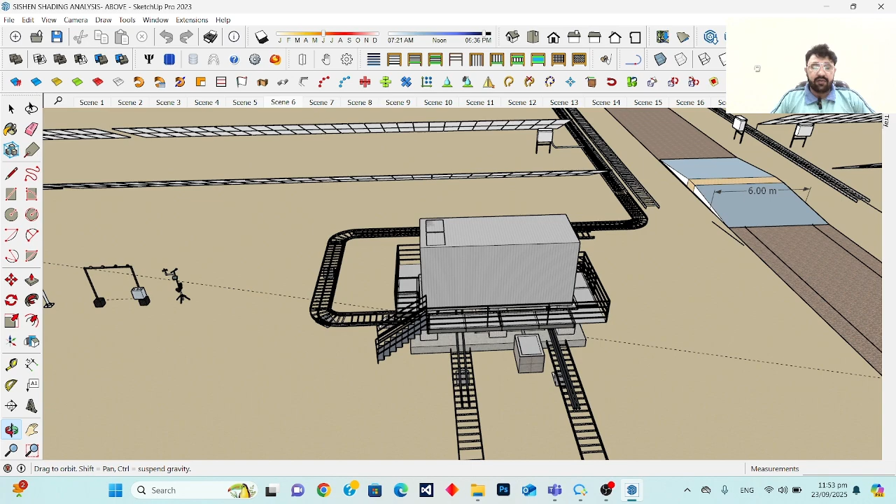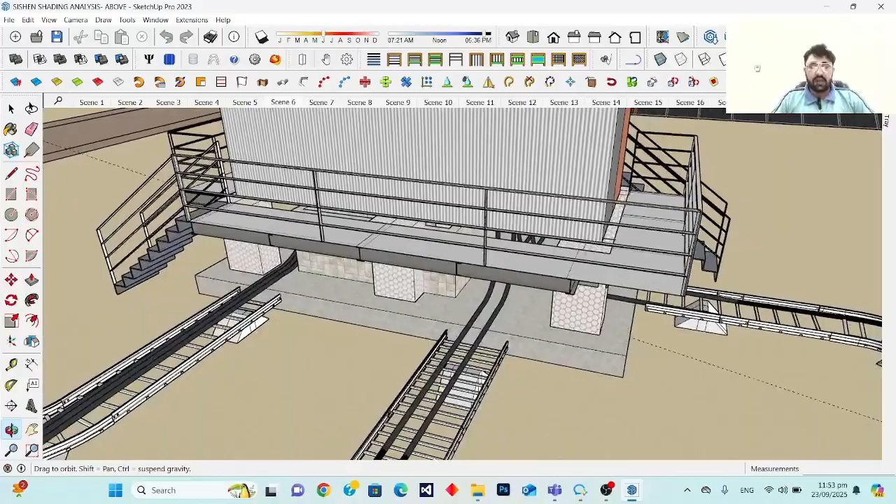So for that reason, I am giving you one solution, so you can propose this solution to your client. Basically, this is the overground solution in which we have designed the MV skid over the ground, giving the platform, and then we give the footing for the MV stations, and also we have given the platform for the maintenance purpose, and also we have given the stairs.

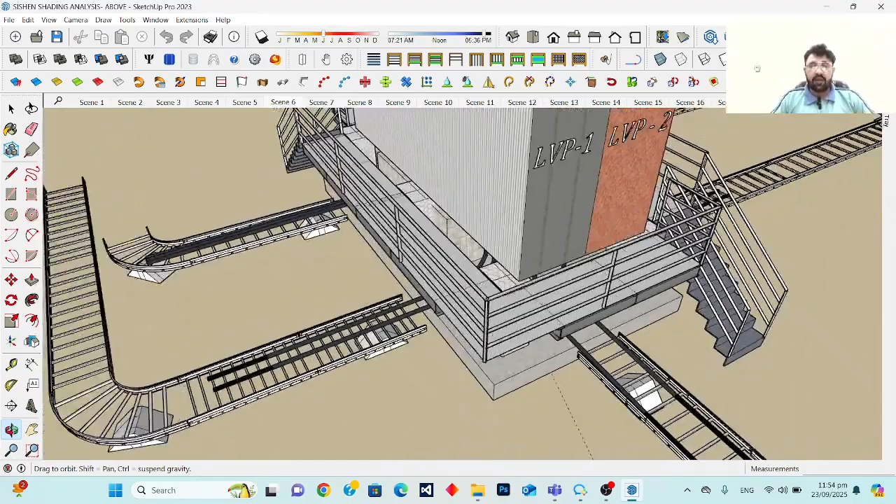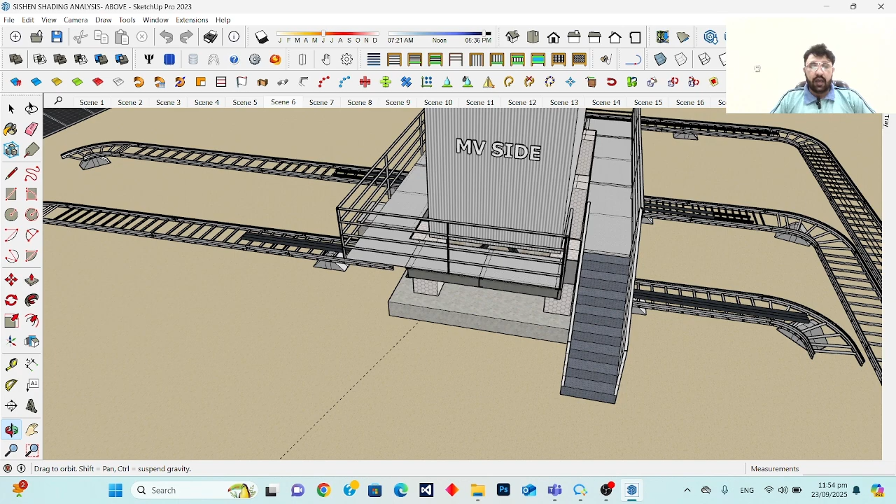So if anyone wants to go up for maintenance purposes, they have to go through the stairs option, and also there are platform areas on both sides, for the MV side and for the LV side. We have given the stairs and also the railing option. So when you are working above the ground, like 5 to 6 feet above the ground, there might be a safety issue as per the standards.

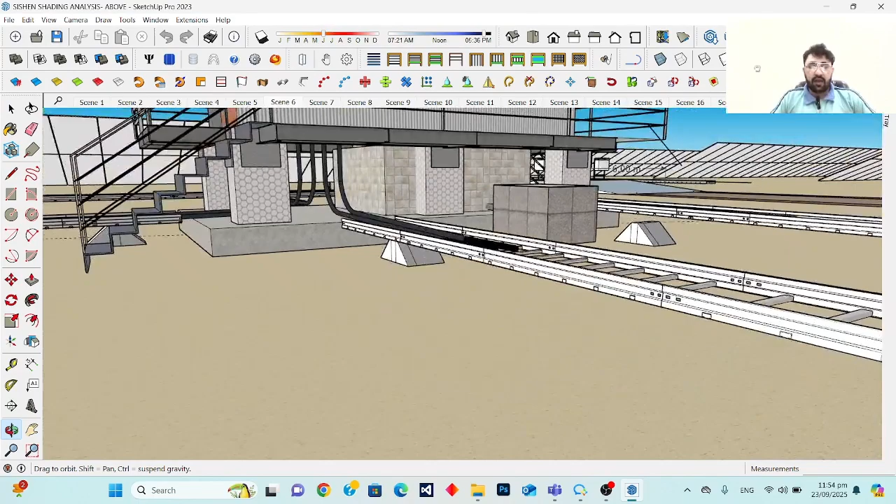So that's why we have given the railing for that purpose, and also we have given the cable tray installation and the sump pit for the oil of the transformer, and the cable entry under the ground as per the bending radius from the manufacturer.

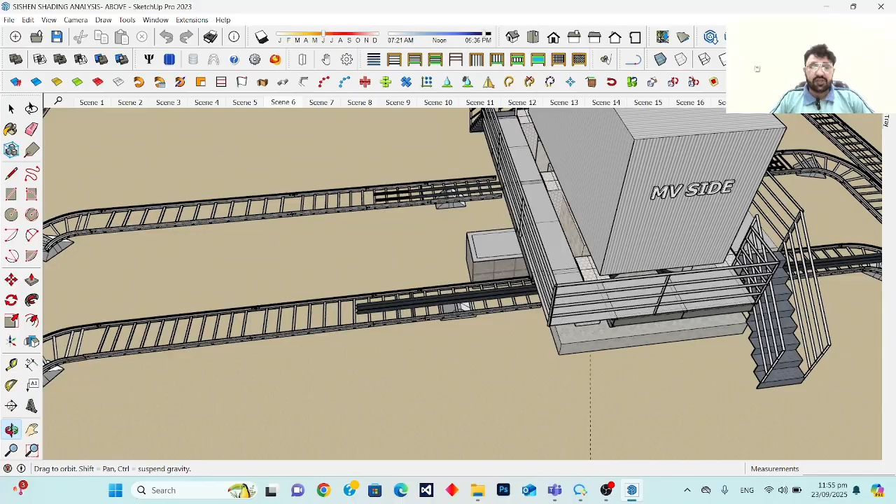This side is the MV side. The cable will come from the other MV station, terminate here, and then go out to the next MV station or to the switching stations. And this is the LV side, with the LV panels there. There are two LV panels in the MV skid. From three sides, the LV cables are going.

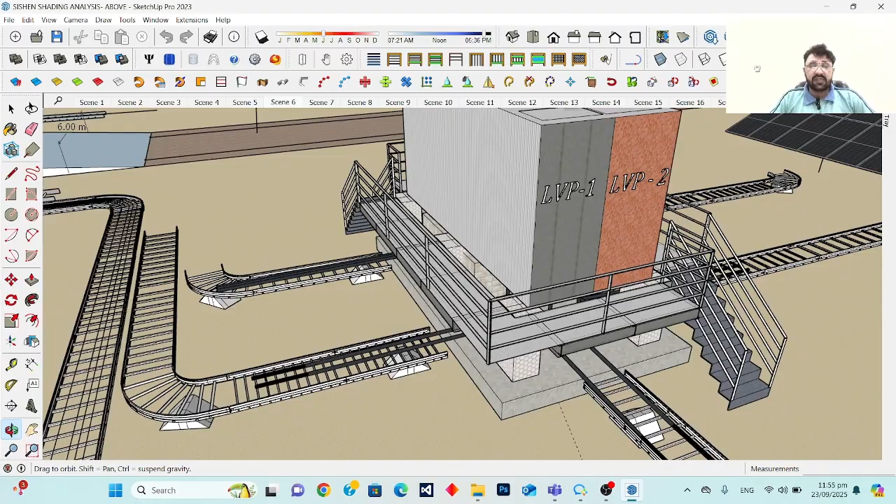So if you are facing an issue like that, you can go with this solution. This solution is very suitable for the above ground options.